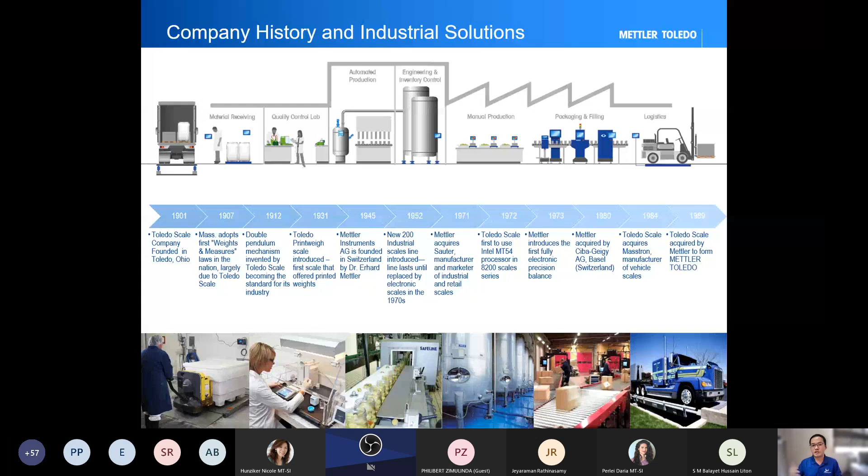And we are serving the market in multiple segments within the production, the chain of production, right? From material receiving until the stage of logistics, where you put your stuff on the truck, go through the weigh bridge and then drive out. So we have been serving the community, the market for roughly about 120 years, in one of the major segments in the whole production line.

In terms of our offices around the world, we have our factory in China, also in US. Again, depending on which part of the country we are supplying, the weigh bridge, the load cells, the accessories will come from different places. But 90% of our scales today most likely come from China because we are in the Asia Pacific, and China is much closer. But in Europe and America, Canada is served by our US-based factory.

And last but not least, in terms of market position, we have to say that we are very close to the top, or number one, in terms of vehicle weighing, or what you call weigh bridge. We are also very well known for our lab weighing and retail weighing. So if you are in the retail segment or lab segment, if you have that business of your own, most likely out of 10, you may have seen some of our equipment used by maybe your customers or your suppliers.

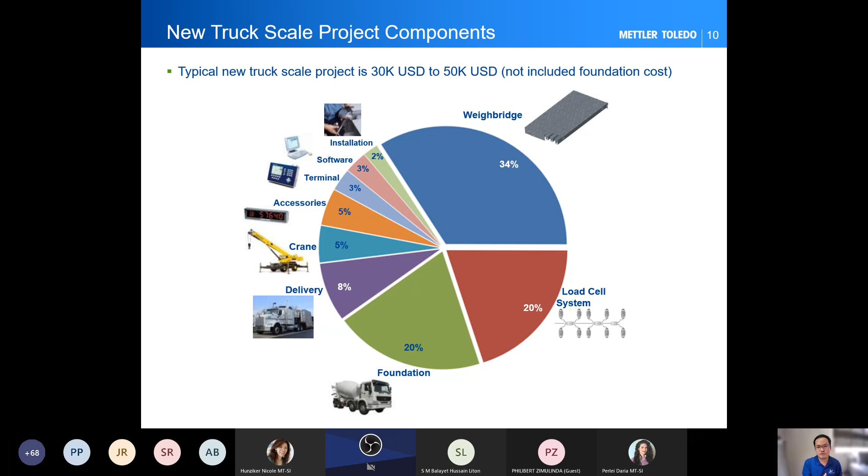But first things first, we'll go through the load cell - what is the load cell and how does the load cell behave - before we go into the more modernized discussions.

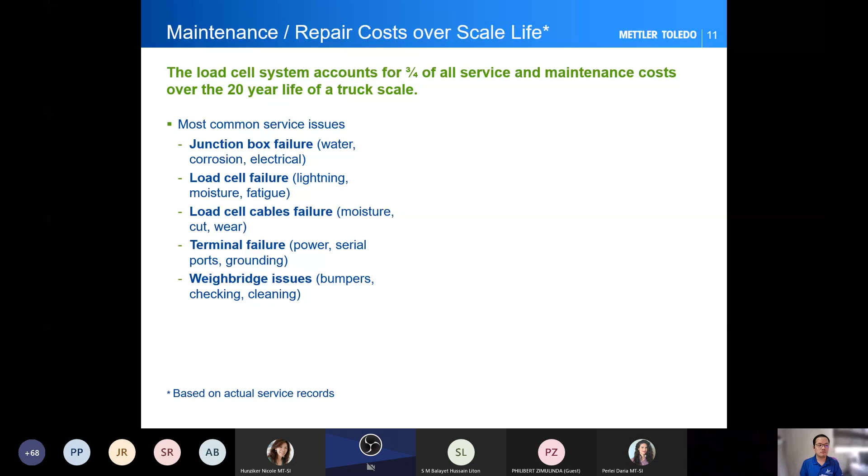So I talked about the cost of ownership. But anything we buy in our life - not only for your factory or production, but even at home, even at the office - comes with a maintenance and repair cost. Take your air conditioning unit for example. You need people to come and service it every 6 months or 1 year. Those are costs - money you need to fork out every 6 months or every year just to service your asset. Those are very important.

Now for our weighbridge, the maintenance cost breaks down into multiple parts. The biggest chunk of spending that goes into a weighbridge system for maintenance and service is actually the load cell. This is what we experience as experts in the market.

Traditionally, if you're using analog load cells, if you're using very old technology load cells, you can expect the company to keep changing the load cell because it doesn't last. And the load cell always gives you a different reading, not an accurate reading.

For multiple reasons - maybe the junction box fails. If you know about your load cell system, you know some load cells in the market still use a junction box. The junction box sums up different data, and it's really a fragile box. Later I'll show you some pictures of how fragile a junction box is - what actually happens when you put a junction box unprotected. When your junction box fails, most likely your load cell, if you're running on a junction box system, will fail. And when your load cells start to fail, most likely you'll also discover your cables start to fail.

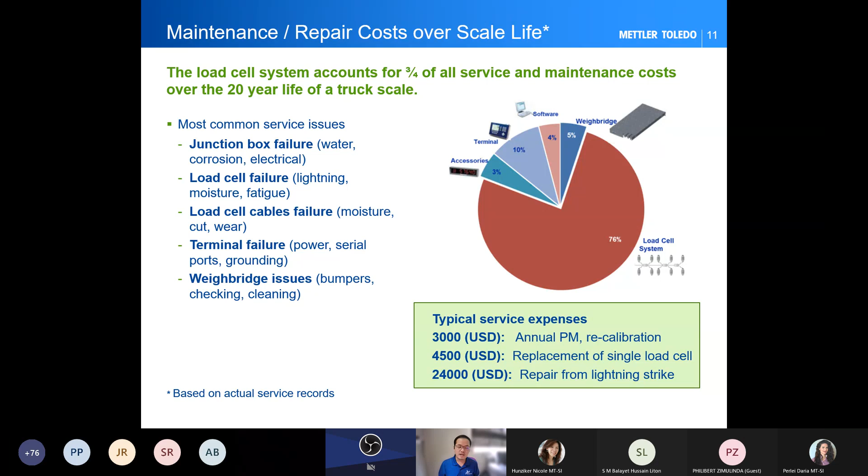As you can see, buying a weighbridge itself, like I showed you before, is really between 30,000 to 50,000 USD. But when you factor in maintenance, it really adds up quickly over the years—3,000, 3,000, 3,000 over 5 years, you have spent 15,000 for nothing, just to put on something that's incompatible, not suitable for your weighing process, etc.

So I won't repeat this, but what I really want to stress is that buying a weighbridge, as an asset investment, is really a 10 to 20 year cost of ownership. You are not going to buy a weighbridge and just put it there expecting to change it every few years. This weighbridge is something you buy and plan for between 10 to 20 years before deciding to replace it with newer technology, or replace the deck, or whatever. That is why you want to choose the best for your asset—it's just like buying houses. You have a certain budget, and you want to choose the best based on that budget. That's how we call it: choosing the right asset for your investment.

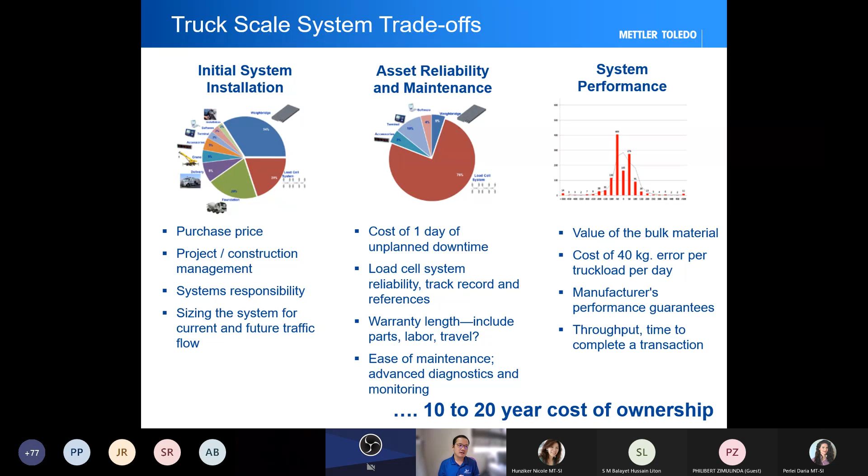All right, so now, in terms of weighbridge...

There are a lot of things happening with your weigh bridge. If you are not designing the weigh bridge as per what you are using right now, if you buy a substandard load cell at a very cheap price during your first purchase, what you may not really know is that the load cell or the weigh bridge is giving you inaccurate readings.

You just put it in there, and for the first 6 months you don't really see any problems because you don't have any baseline to compare with. After 6 months or maybe a year, you start to realize why 40 tons of coal have become 40.5 tons over a year, but actually you are weighing the same thing. The material does not change, the truck does not change, it's more or less the same thing, but you are reading it differently.

This reading inaccuracy comes from a lot of different reasons. It can be from your load cell, it can be from the weigh bridge, but 80% of the time, I would say it comes from the load cell. Like I said, the load cell is the brain of the weigh bridge. It transforms the weight of the truck into a readable signal back to your terminal.

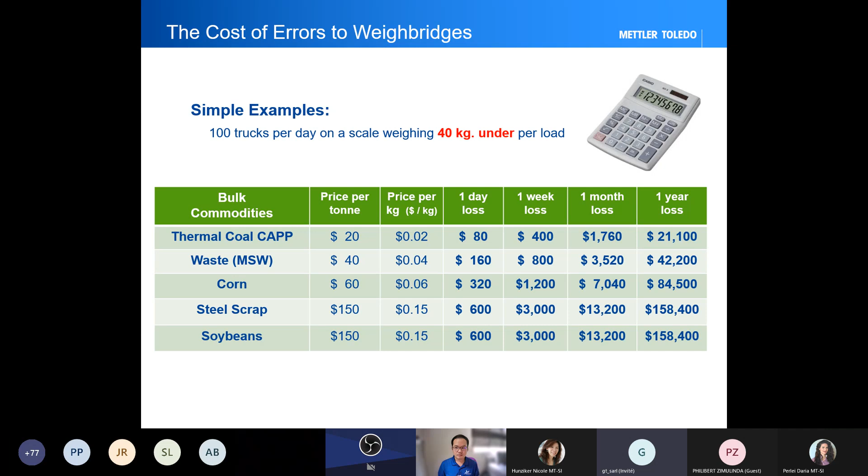So next is really what I want to show you, what I want to stress on, is the load cell itself. In METTLER TOLEDO, our load cell, we call it a power cell load cell because it's really not a digital load cell, not an analog load cell. And why do we call it power cell? Let me tell you why. We have been calling our load cell a power cell load cell for a number of years now.

The first version of the power cell load cell came out roughly in the 1980s, where we called it 0760. At that time, a lot of different things were named by code, they don't give it a name. If you go back to history, even the PC wasn't called a PC, they called it with some code names - that's the trend during the 1980s.

Over time, we migrated to an MTX load cell. If some of you have been using our MTX load cell, thank you very much for your support - it's a very reliable load cell. But as time goes by, we have advanced in terms of the technology we put into the load cell. Right now, we have two different models, the GDD and also the PDX load cell.

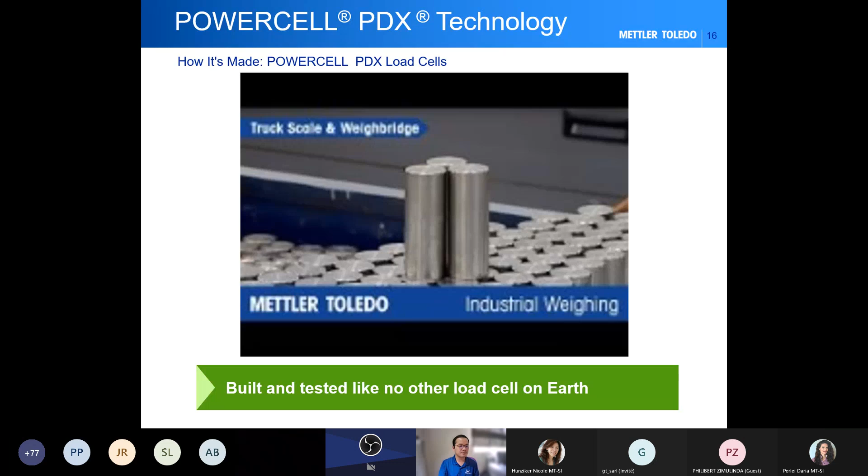What's so good about PowerCell PDX? When we first launched PowerCell PDX, the one thing we always promote is the ability to phase out the junction box 100%. That's the easiest added value we can bring to your weighbridge operation. That's why we always tell our customers PowerCell PDX is very easy - you are changing from a junction box, full of issues, to a daisy chain, what we call load cell to load cell connection.

With these load cell to load cell connections, you are technically reducing time when changing your load cell, because you do not need extra connections or extra steps to connect your load cell. It's really plug and play, just like your PC or laptop - you plug in, turn on your terminal, and it's all working again. You do not need any additional steps just to connect your load cells.

Aside from that, one thing we are very proud to bring to you in the PowerCell PDX load cell is the CAN bus network. Traditionally, a lot of load cells use an A to D converter in the junction box itself - meaning you get an analog signal, let's say millivolt signal, and that is converted to a digital signal, readable in kg or tons, summed up in the junction box. What we do is all of that inside the load cell itself. We no longer separate these things into external equipment - we do everything within the load cell, and we convert this digital signal to a CAN bus signal.

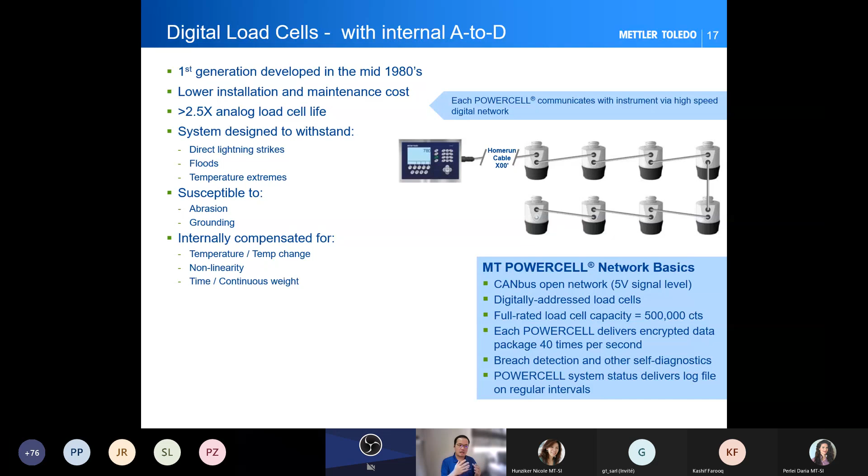Last but not least, what we always tell our customers is when you want to change your load cells, you want something easy, because not everybody is a technician - we cannot train everybody to be good at changing load cells. We built these load cells for you to change with just a few touches. Just take out the cables, plug the cables back into the new load cells, start up the terminal, and that's pretty much about it.

I will not go into great detail on this overview of the PowerCell load cells, but one thing I want you to understand is that our PowerCell PDX load cells are IP69K certified.

If you are familiar with IP rating, the ingress rating, IP69K, you will need to go through a jet spray testing at different angles at a 60 degrees Celsius water jet spray for 30 seconds per pulse for a number of times to get it certified. And to be honest, it's really hard to get this IP69K rating for any equipment in the world. We are fortunate that our load cells, with state-of-the-art laser welding at our factories, are able to get these IP69K certifications.

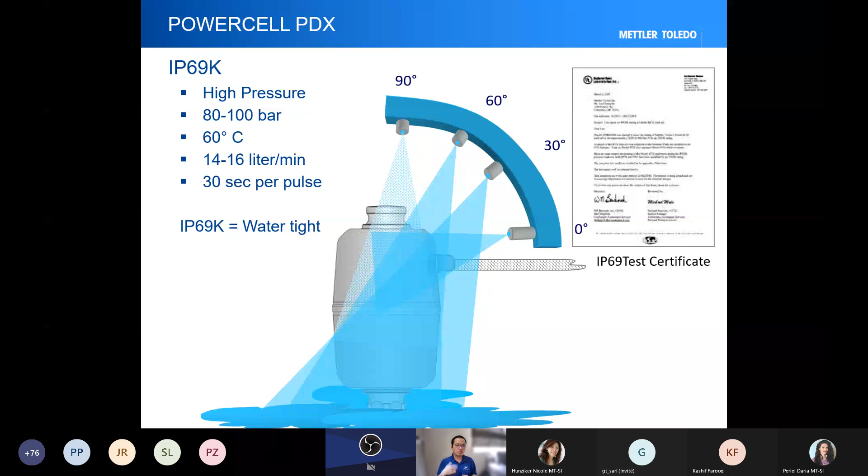When you buy our PowerCell load cell, you can always request for these certifications. If you are working on your EPC project and they want certain proof of this IP69K, we can provide these certifications, no problem.

This is just a little test that we do in our office. We submerged the whole load cell, all connected together back to the terminal. Believe me, we are not cheating here - you could buy one and test it yourself. It will not stop working, it will still work. For almost 500 days now, we've kept it inside the aquarium. It does not fail - it will still give a correct reading. You put 10 kg of test weight, it still displays 10 kg.

This is something we are very proud of. I'm not sure about other regions, but regions like ourselves in Malaysia, Thailand, Japan, Korea are very susceptible to flooding at site, to be honest. So this helps our customers have a worry-free asset in your weighbridge management area, so whatever happens, when flood comes, you don't have to worry. At the end of the day, when the flood subsides, you can still use your weighbridge.

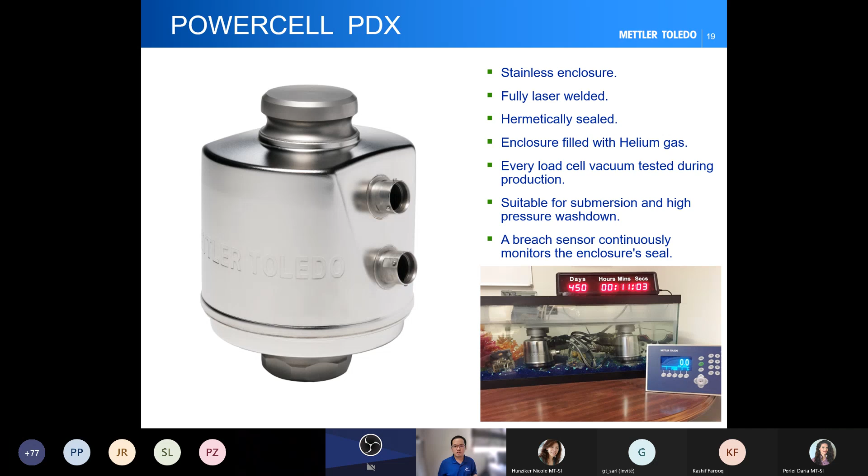Last but not least, I talked about the IP69K and how easy it is to replace your load cell. The next topic is lightning protection. If you know about lightning, you can have a rough idea of how dangerous a lightning strike is. One normal lightning strike on a normal rainy day creates about 20,000 amperes of load, of voltage.

Of this dangerous strike into whatever it strikes. Our PowerCell PDX load cells can actually withstand 3 times the normal lightning strike rating. We don't just say this because we think it can withstand that - we send it to a third-party lab, nothing to do with METTLER TOLEDO. We send it to this lab to try to get certifications for these PowerCell PDX lightning protections.

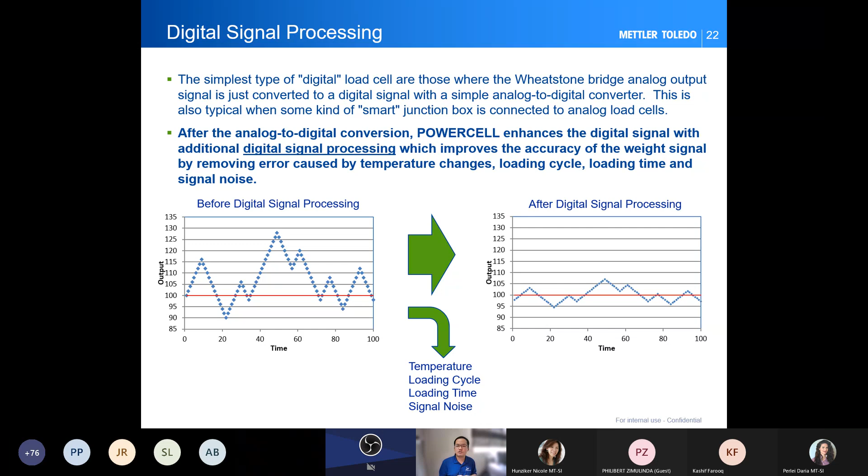There are really three major compensations that we do inside the load cell. First is the temperature error.

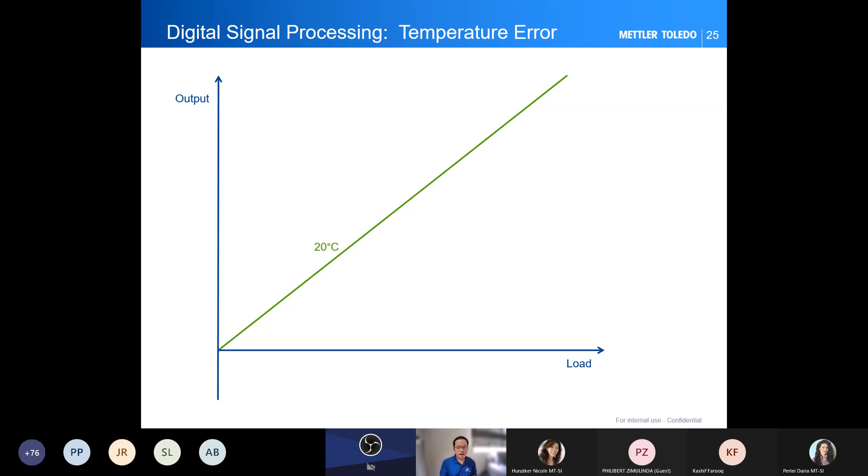As you know, if you are living in the equator area, you go through 30, 40, 50 degrees Celsius. If you're living somewhere north, like my colleague there in the Baltic region, you can go down to minus 10, minus 20. But I'm here to say, if I use the same load cell and put it in, let's say, Bangladesh, giving it 10 tons, it will read 10 tons. If I use my load cell and put it into the Antarctic, giving it 10 tons, it will read 10 tons. It will not give you any lower or any higher.

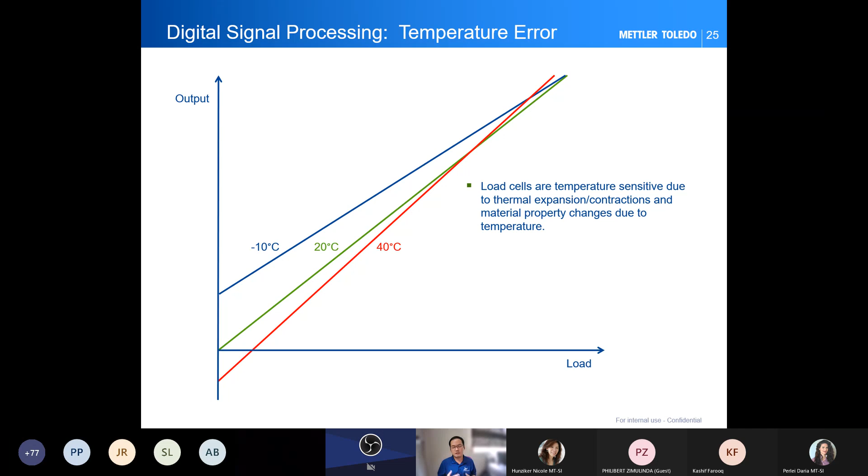The reason is because we compensate for the thermal expansion of the material itself. When it expands due to very hot conditions, we compensate. When the material contracts due to very cold weather, we compensate, so that you can get the most accurate reading from the load cell. So what we really want to do is bring everything to the straight line, as ideal as possible.

Next is what we call linearity and hysteresis. I don't want to get too technical into the terms, but this is what it means by the load cell itself: how good is the material that you use?

It's not a perfect state. What we mean by saying it's not a perfect state is because any material in the world that you use is not a perfectly static material. It's all moving, the molecules inside the material are moving. The book that I'm holding is not a perfect static material, the molecules inside are moving. Same goes for the load cell.

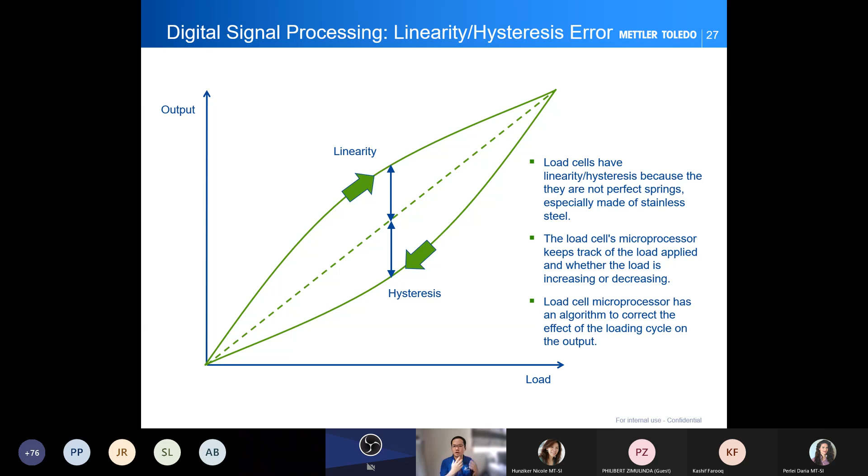So when you put load on top of the load cell, it will be compressed, and during cold weather it will contract. So there's movement in this compression, there's movement in what we call the linearity and hysteresis. That's why we put this into the algorithm, to counter this law of nature, because we cannot go against this. This is something absolute, everything is not in a perfect solid state. Everything, the molecules are moving. We are trying to compensate for all this movement that is really happening at the load cell itself.

So again, we try to bring it into the straight line, the most ideal case.

Last but not least, and like I told you about molecules, molecules behave depending on what kind of temperature you're living in. This is what we call creep error. So the sensor inside is really there to check at what temperature the metal is behaving, and at what state. That's what it really does, in layman's terms.

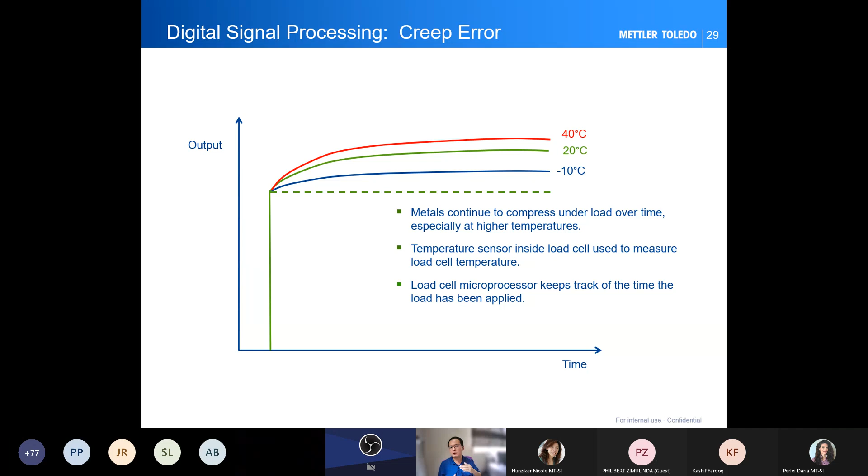So the microprocessor keeps track of the changes over time so that the output you are getting now is as ideal as the factory setting itself. 10 kg will give you 10 kg. This is what we really want to achieve in the long run. Of course we are not perfect, it will still drift a little, that is why the microprocessor tries its very best, by algorithm, to pull back to the ideal line of reading.

So these three items are really what we have put into the PowerCell PDX load cell. And of course we have different types of compensation. If you want to know more, I have a PowerCell PDX white paper that I can send to anyone who requests it, and then you can go through what is really happening with our PowerCell load cell.

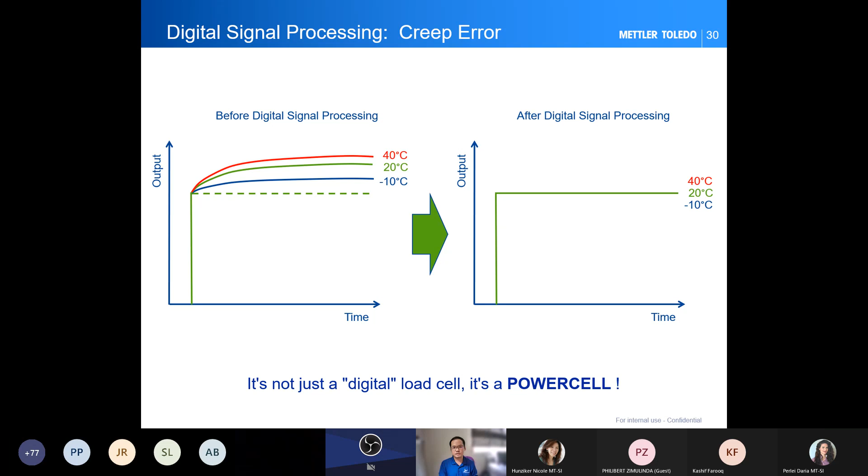I really don't want to compare technology too much, but we have journeyed from what we call analog load cells—METTLER TOLEDO was selling analog load cells 40, 50 years ago. We cannot deny that, because that was the advanced technology at the time. But now we have migrated to PDX load cells. We want to look back and compare what actually improved over time.

And the easiest thing that you can recognize is that we no longer use what we call the junction box. We now use just a daisy chain—everything is connected from load cell to load cell itself.

One thing I actually forgot to tell you guys, because it's such a big feature to bring to you, is breach detection. That's actually the gases we put inside the PDX load cells, just for us to detect if there are losses in the gas itself.

Meaning if there is a punctured load cell, the terminal will tell you about it. Why do we want to do this? I mean, we could just seal it and trust that our welding is perfect, trust that our material is perfect. But we go one step further.

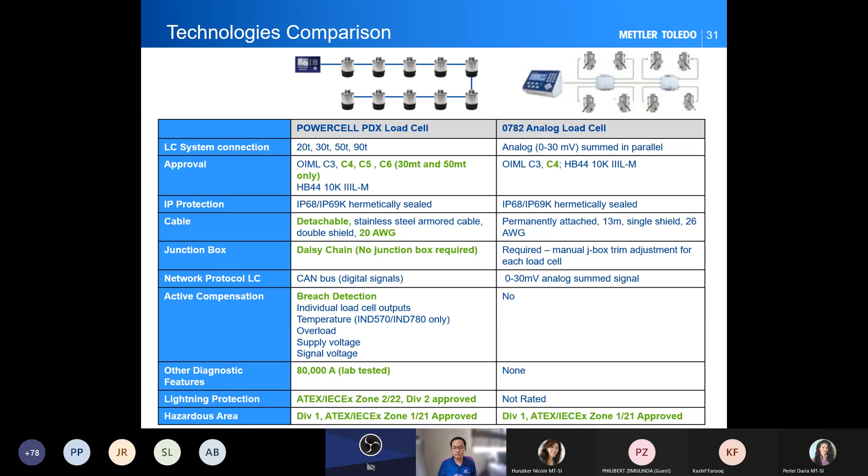And last but not least, at the moment we are able to support up to Zone 1 already, and it's Zone 1 certified. If you have any projects related to Zone 1 or Zone 2, do let us know. We can provide a solution using our PowerCell PDX and our IND terminals to be supplied and installed in the Zone 1 or Zone 2 area.

All right, like I promised, I want to show you some of our own older junction boxes that we put on site. Some of it is from our competitors, but I do not want to mention names here. The junction box is really easy to be penetrated by water because it's usually put under the weighbridge itself. So when the water goes in, as you know, water touching electricity spoils everything, because it shorts everything inside. And since it's not sealed correctly, it's very easy for dust and any external materials to go in and disturb whatever you are doing inside the junction box.

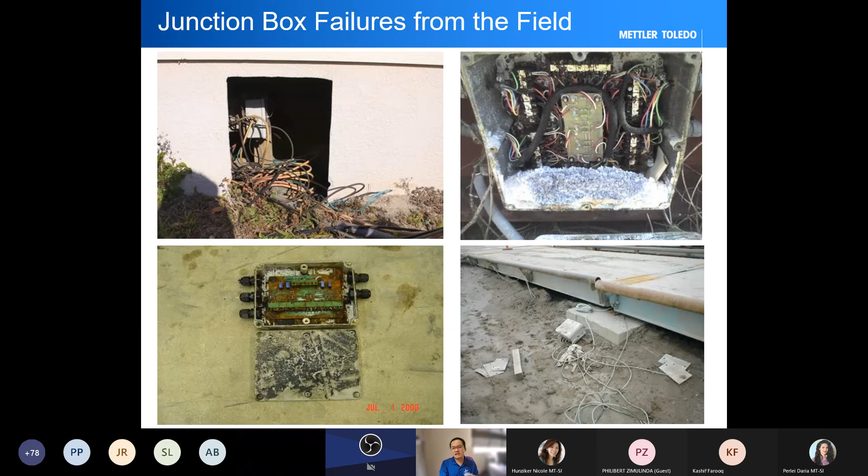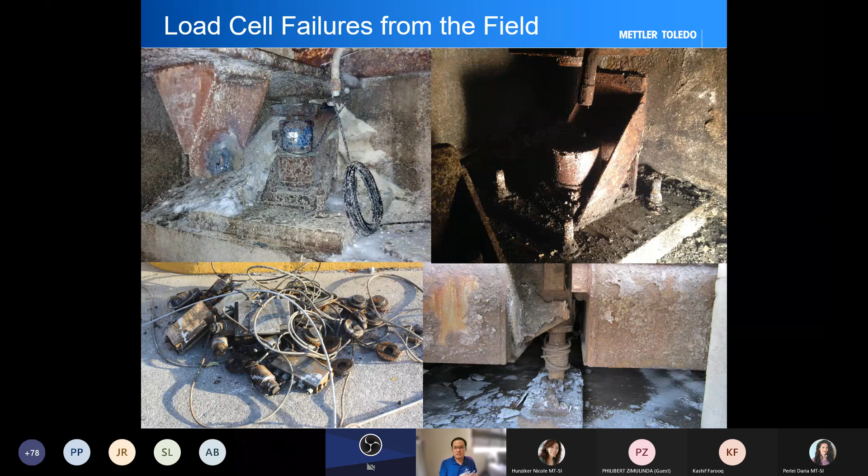With the junction box, you have cables running to the junction box, to the load cells, and from the load cells to the terminal. All these cables easily get tangled within your bridge. This is something I did not believe when I first joined this department, because hey, a bridge is such a big piece of equipment—how could it turn the cables and tangle the load cell, right? But it actually does, because a lot of the load cells in the market do not have an anti-rotation feature. Whereas, good news to you, our PDX actually does have anti-rotation. So anything you put there will not run, will not turn, it will stay as per what you installed on the first day.

All right, so like I said again, in terms of technology, we are not really comparing brand to brand, but what we are comparing is how far we have journeyed in terms of technology, from analog, to digital, and now to POWERCELL. And if you buy POWERCELL, this is the best thing you can do for your weighbridge, because now you are buying the latest technology for your weighbridge system, the latest technology in the load cell product itself.

Once you adapt the new technology, you really do not want to go back in time and adopt an older technology. It's like using the latest version of your Android or iOS—you really do not want to go back two versions, it just makes no sense. Something that is already created that is more advanced, you should have the opportunity to use it rather than going back to the older technology just because it's very cheap and people don't want it anymore. People are trying to migrate to a newer technology.

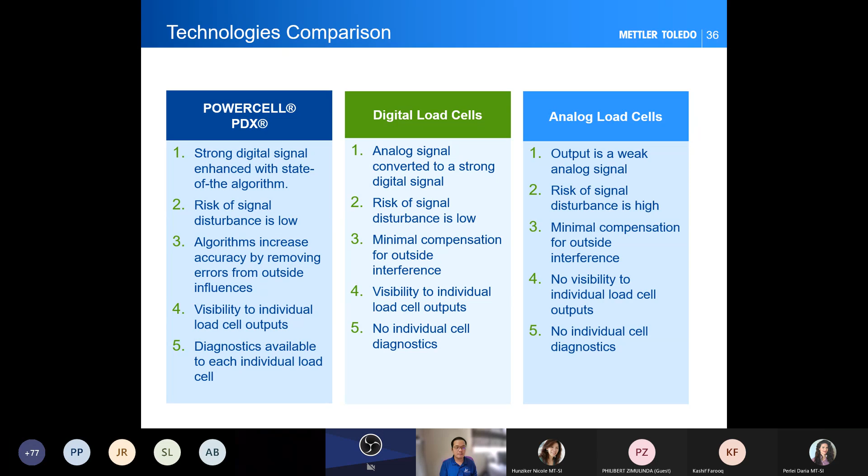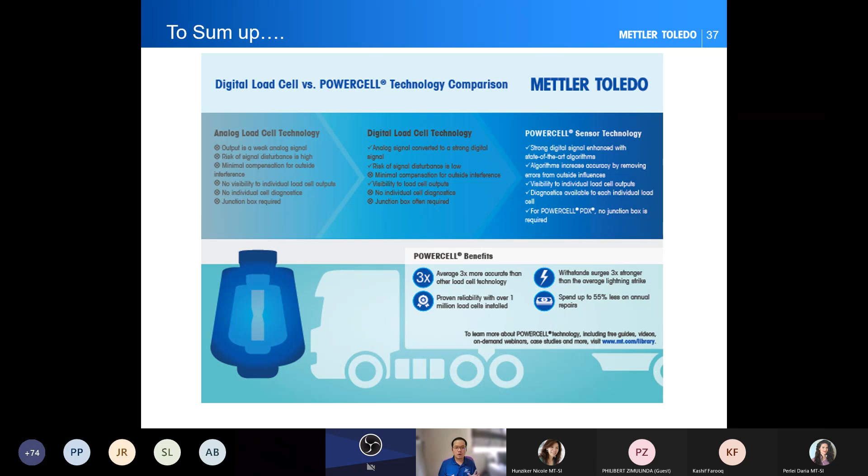To sum up before the final slides, POWERCELL is a great load cell that METTLER TOLEDO has created over the years. Try your best to understand more about POWERCELL, because the features inside the POWERCELL PDX are more than what I can brief today. What I've shared is really just the tip of the iceberg. There's still a lot you can do with POWERCELL PDX in our weighbridge system. If you have questions, reach out to our colleagues in the chat room, or call them, check our website, and inquire about this POWERCELL PDX load cell anytime.

Last but not least, I have 5 minutes left, sorry if I go over time a bit, because I think this is a really interesting case study I want to share. This is an animal feed plant I worked on in Vietnam. I don't want to share the name, but it's a very well-known animal feed production plant.

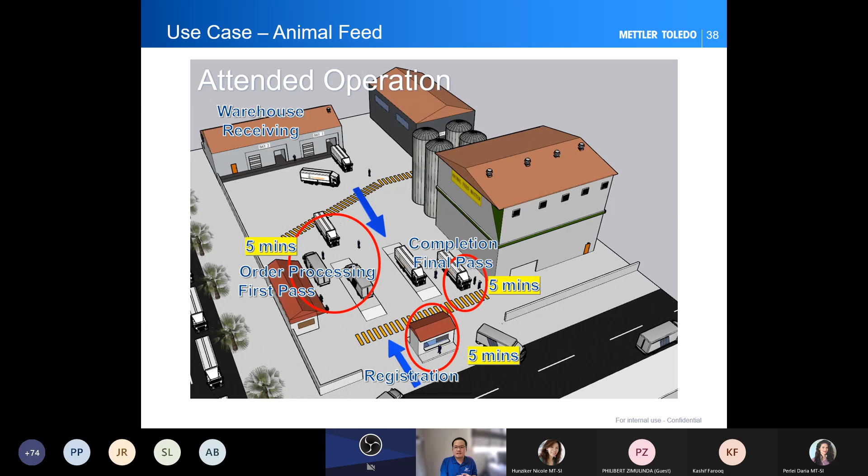So the question is, how long does the whole operation take? There are 3 different areas that take the most time. First is registration at the guard house, let's say 5 minutes. The order processing, if the truck driver is able to walk very fast, 5 minutes. And completing the transaction, if the truck driver reacts very fast, another 5 minutes. So you're taking 15 minutes per transaction.

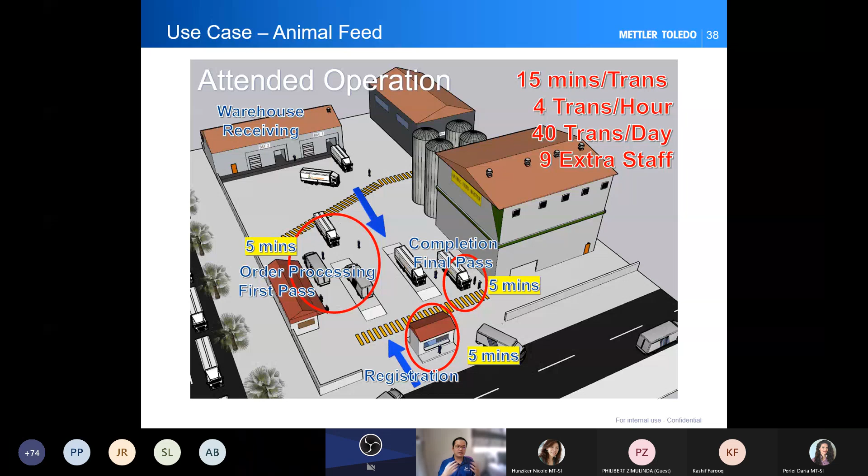You're only able to do 4 transactions per hour, which is only 40 transactions a day. That's not a lot for 40 trucks a day. But you're investing in a weighbridge that costs 30 to 40,000 USD, and on top of that you need to hire between 5 to 9 extra staff to manage the traffic. There's a lot of money wasted just because you're going through a very manual way of doing transactions.

What we did was put in unattended operations for the whole scenario. Registration is no longer needed - only for a new truck that hasn't been registered before do you need to go through registration. Once registered, everything goes through long range RFID. The truck goes in, the barricade automatically opens, and captures the weight. The truck driver doesn't even need to come down to do any registration.

Everything is automated. Going to the warehouse, even there, everything is linked - the warehouse staff can see what's in the warehouse, what incoming trucks there are, all of that. Once the truck driver picks up, they can just drive out of the weighbridge, off the plant, and off they go.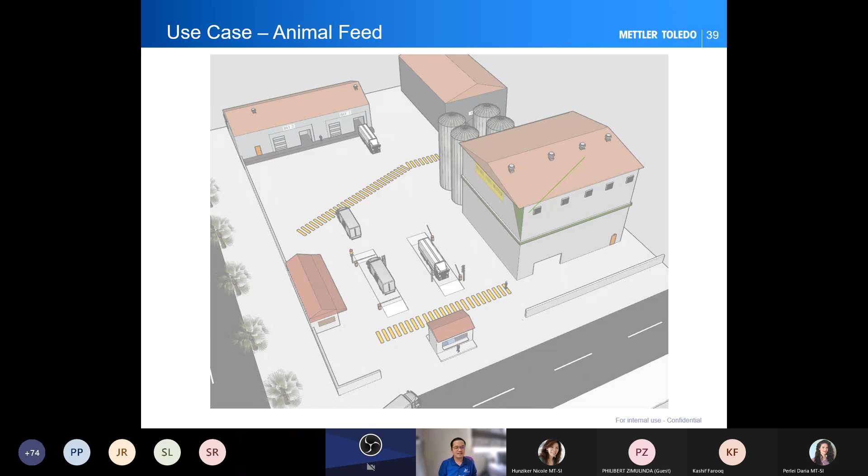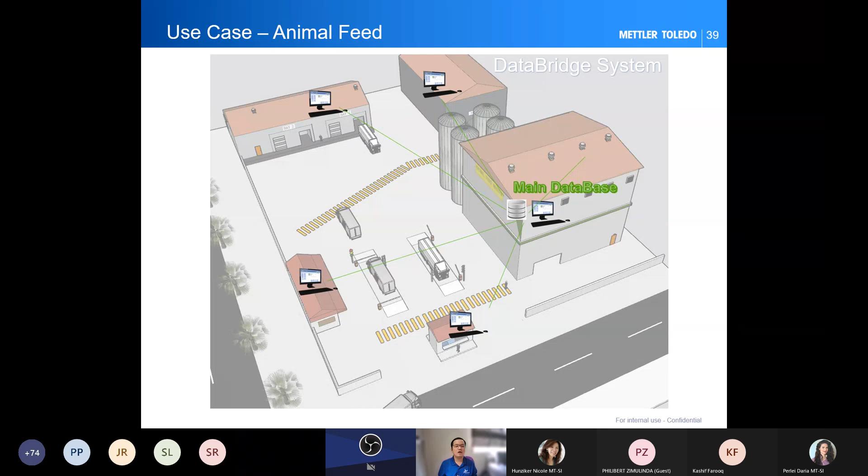This is what we put in place - I won't go into the whole process, but we have software called DataBridge to link all of this up into an unmanned, unattended system. If you want to know more, please catch up with our colleagues in your respective region or country. We will come and advise you on the best method to improve production at your plant.